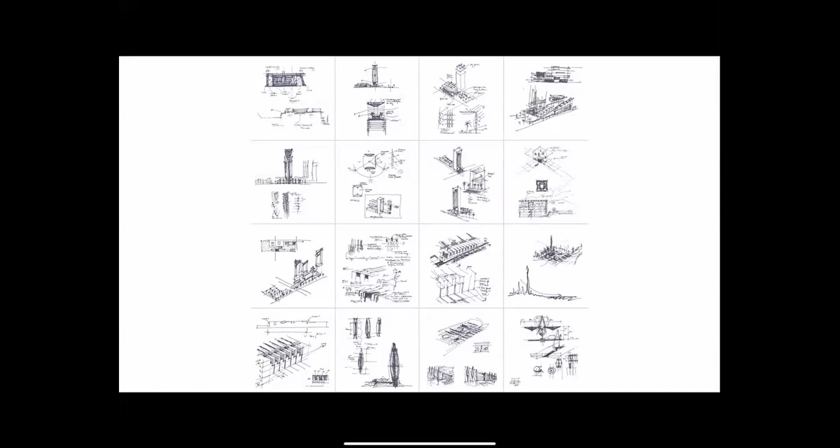And you can see that the center of gravity very much is in Canada and the US, but our UK and Middle East groups are also pretty healthy, and we tend to work very much as design groups. Each group has its own design center. We understand the specifics of our region, the culture, economy, what kind of projects work in this part of the world. And I've been very fortunate in my own life to work with Norr for 24 years now, all in Dubai. And it's been a tremendous opportunity to build a design culture in Dubai for our group, and then to really see what boundaries of design we can explore for our clients in the region.

Over the 30 years that our group has been here, we worked on a wide range of projects. And what ties our work together is our core belief. Our core belief is really that many minds are better than one. This kind of collaborative approach to design, where the owner, operators, engineers and architects, interior designers, specialists, we all come together to create, to explore options and then to hopefully create something unique.

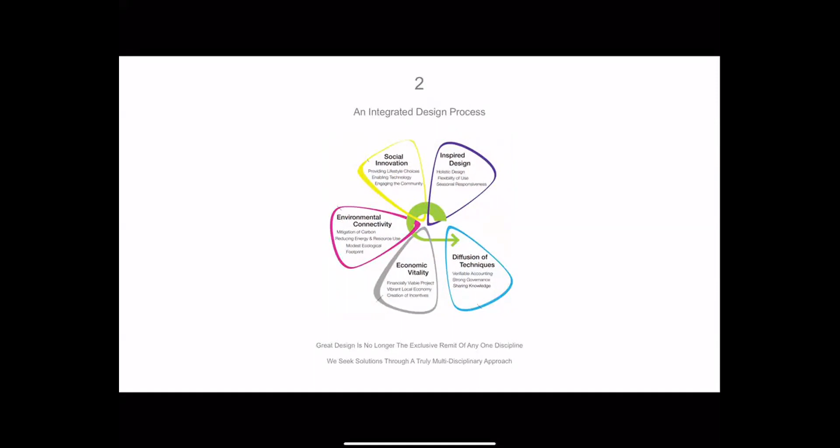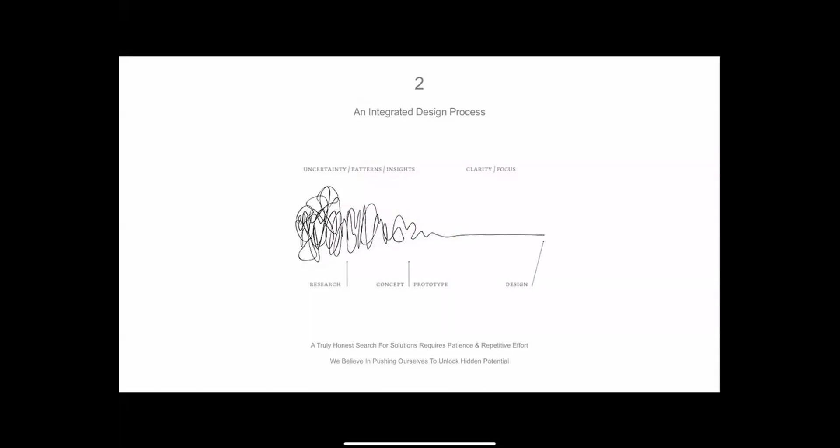We also believe in an integrated design process, one where science and art, economy, social concerns, environmental concerns, they all have to be dealt with simultaneously. It's not really a question of doing one thing first and doing the second thing later. You actually have to do everything at the same time. And so research and conceptual work, for it to be rich and exciting, and for it to really push boundaries, you have to be honest in your search. And that requires a lot of patience, and it also requires a lot of repetitive effort. And finally, we believe in technology.

Technology is changing our lives in tremendous and dramatic ways, and the future is really something many of us are wondering: where will technology take us in the near future? So the power of collaboration, an integrated design process, and embracing technology really is the thesis of how we work.

And I think that's why it's really exciting that we got a chance to join you this afternoon in Bangkok, but different times of the day across the world, to show how some of these beliefs have shaped this particular project. And then the kind of work we do, I'm just scrolling through it very quickly to give you a sense. Certainly we are known for high-rise buildings.

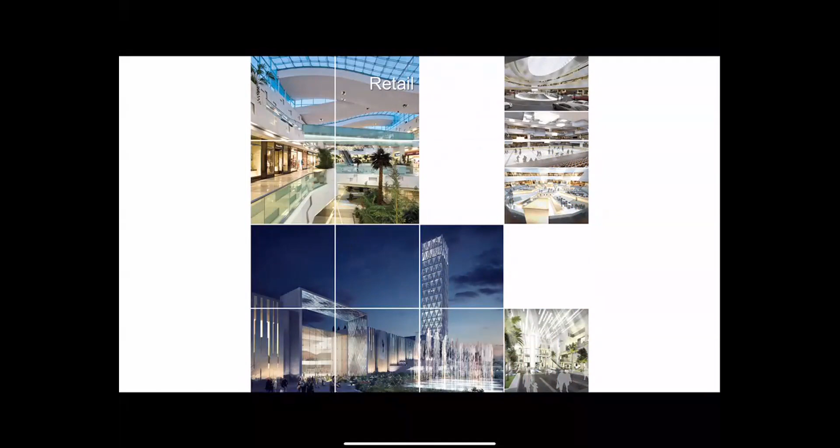We are known for that, but we also design horizontal buildings. And we believe that design doesn't care actually whether the building is horizontal or vertical. The thinking behind the design, this idea of integration, collaboration, and technology, that is really key. And these are a few quick snapshots of our studio in Dubai.

And this process is almost like, the vision really is that our studio is really like a university. It's an opportunity for us to pin stuff up and to move things around through vigorous debate.

So about a year and a half ago, and it seems like a long time ago, I received a call from the first group, our client. They said there is a potential project for us to look at. They didn't say we had it. They said, why don't you look at it and tell us what you can do? And of course, I showed up, and there's your skyline.

And very soon we discovered that they were looking to acquire a property in partnership with another partner. And that property would be developed. At that time, the thinking was that property would be developed into a 50 to 60 story tower, which would be sitting right in front of the Infinity Tower, which is already there.

And when we started to look at this project in the context of the city of Dubai, it occurred to us that where Dubai is known as a city of landmarks, we had the opportunity to propose a new signature tower that would then triangulate and connect visually to some of the other iconic buildings, either built or under construction.

What was also exciting about this project, and is exciting, is its location. It's a waterfront project with really amazing views out to the ocean, views back to the Dubai Marina, which is a very recent development. If I were to take this photograph 20 years ago, there were no towers at all. All of these have been built in the last 20 years.

And then looking back to the desert, which you see in the distance, and then looking back to downtown Dubai, which you would then have on a clear day, you would see the other signature towers, which is the Burj Khalifa on the left and the new tower that's under construction in the Creek Harbor on the right. And so that was the discussion we had with our client.

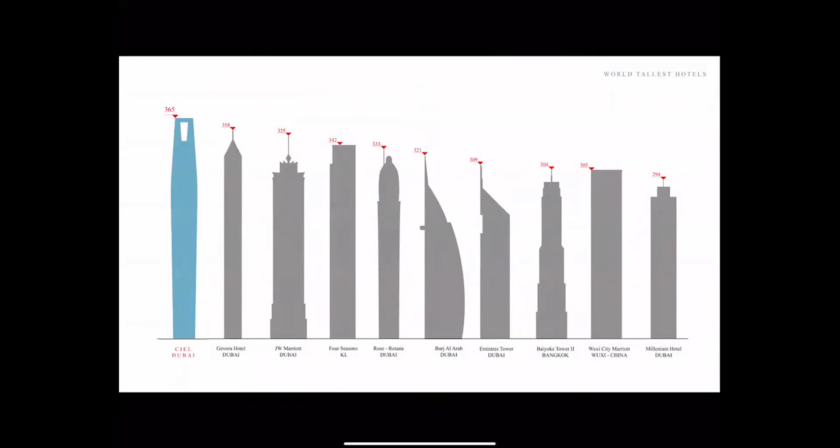The property is not a very regularly shaped property. It's a residual space that was generated when the highway was diverted. And so really the question was for us, what can we do with it? A less than ideal property. And through a very significant process, with the tremendous support of our client, we found a way to solve the problem, hopefully with elegance and restraint.

So when we were looking at this triangular property, it occurred to us obviously that there would be a parking structure that would sit there. And in fact, an earlier consultant had already designed a residential tower of about 65 stories for this property. And that project looked basically like that. That project had an 8-story podium and a rectangular residential tower. And the piling had already been done. This was done in 2007, 2008.

And so 11 years later, the piles are still in the ground, but the project was stopped during the previous economic crisis. And so the question for us was, how can we use the earlier design, especially from a structural point of view? How can we use it, but then retrofit it to become a hotel?

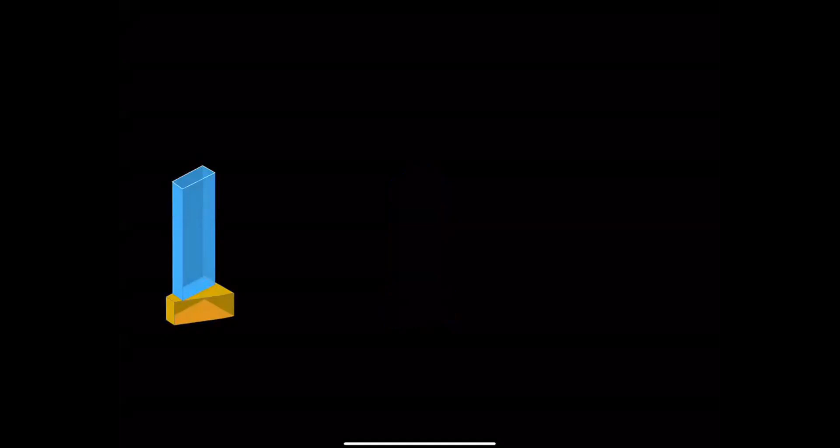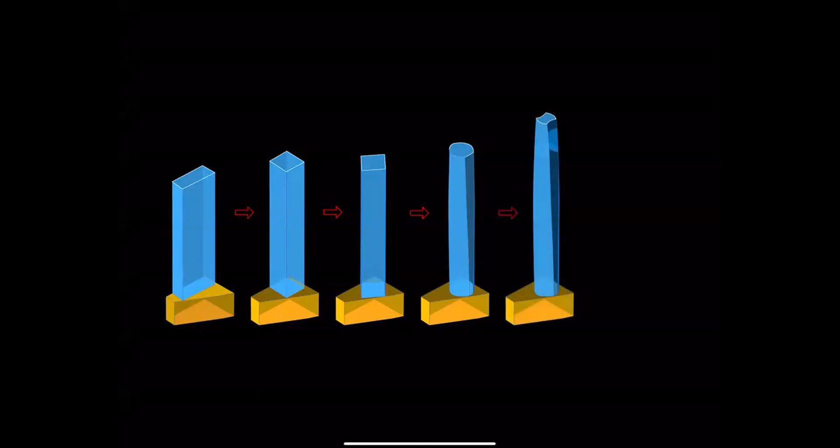And in the early moments of the discussion, it occurred to us that we should look at this project from an open mind. Yes, we will have to deal with the existing piles, but we really should question how we shape the tower. And the process was a very interesting one as we evolved our thinking and looked for a solution that would actually deal obviously with the existing piles with some additional micropiling,

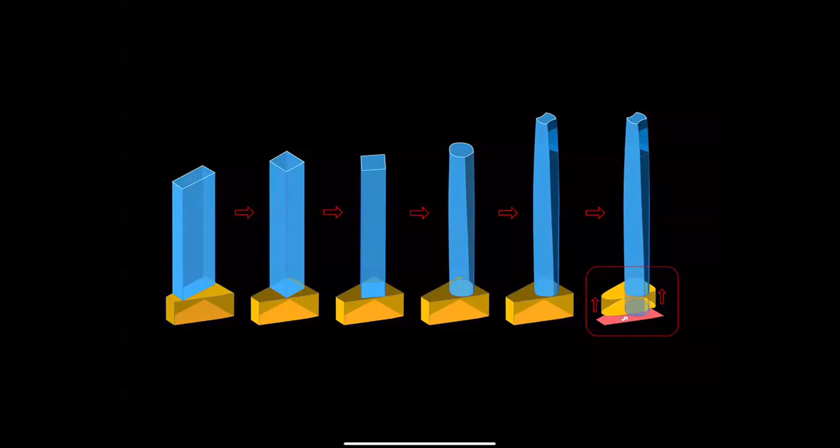and then a shaped building that responds to the very strong sea breeze that comes into this site, but also the idea of lifting the entire base of the project, lifting it up to create an urban space and a drop-off arrival space on the property. And this was a very ambitious goal.

And to be honest, during the process, there were moments where we felt that we're trying to do too much. The property has a lot of restrictions, and will we really succeed? And partly through luck and partly through just dedication and hard work, we have been able to solve it.

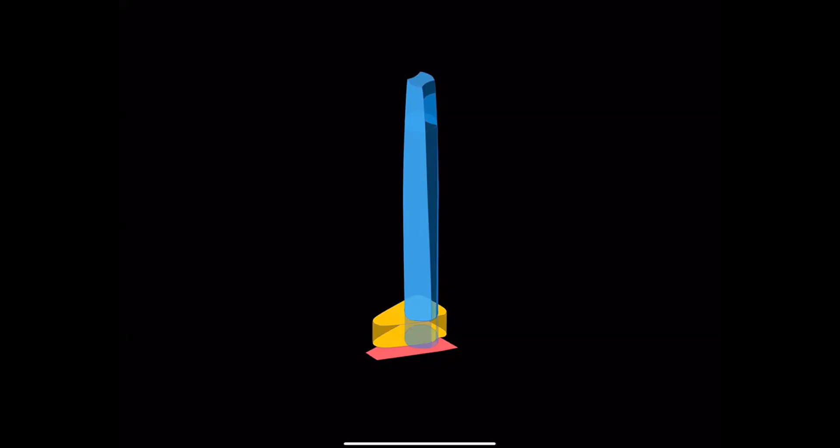The other great consideration was the idea of integrating landscape and nature into the scheme. And very early on, with our client, we proposed that this tower would not just be an ordinary tower, and yes, it's super tall, and yes, it's going to be the tallest hotel in the world, but what else?

And our proposal really is that it's a building that creates a vertical urbanism, an urbanism where landscape and shared spaces rise from the initial moment of arrival through the leisure deck and all the way up the tower to the landscape garden at the very top at about 360 meters above street level, through a series of naturally ventilated gardens.

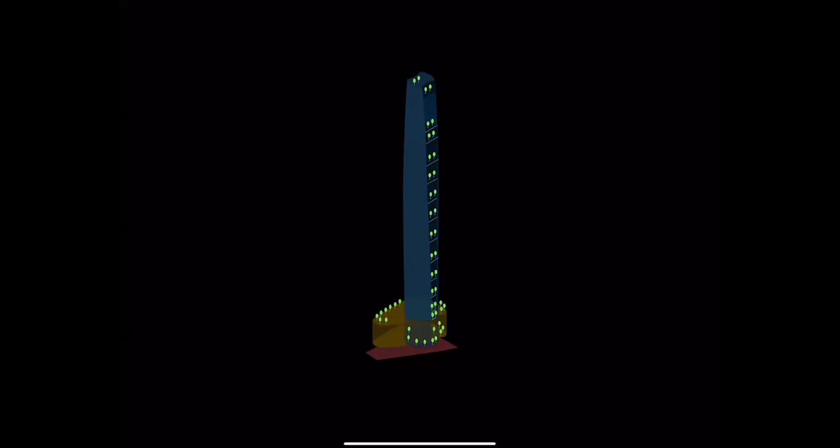And this idea of combining landscape, architecture, engineering, interior design, and then environmental systems, structure and mechanical electrical systems, how do we mold and sculpt all of this to give us what we really want? And we want it not just because it looks elegant, it should work elegantly for the users who use the building.

There's 1,042 keys in this project. There's 5 restaurants, 2 swimming pools, leisure decks, tremendous amenities, shared amenities for the hotel users. How does it feel to actually stay in this hotel? How is it different compared to other hotels?

And that kind of questioning really, in many ways, requires us to step back and to draw and to think, to look at things really from their very, very basic ideas. And we believe in drawing. We believe as a group, and certainly I've dedicated my life to putting my thoughts on paper, even if they seem crude or not well developed.

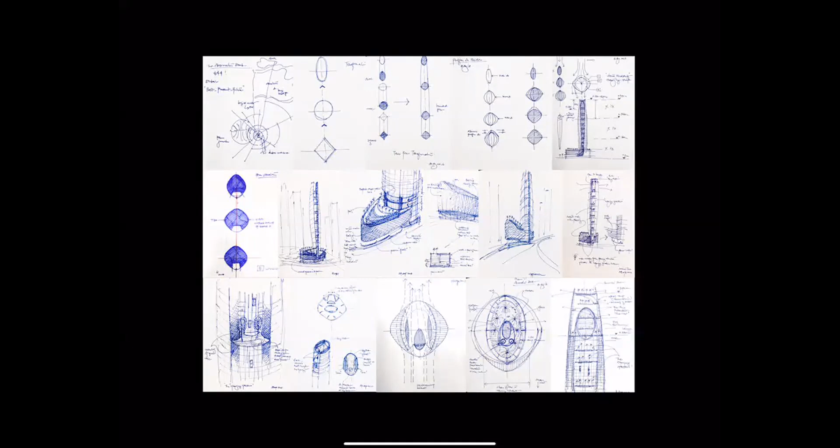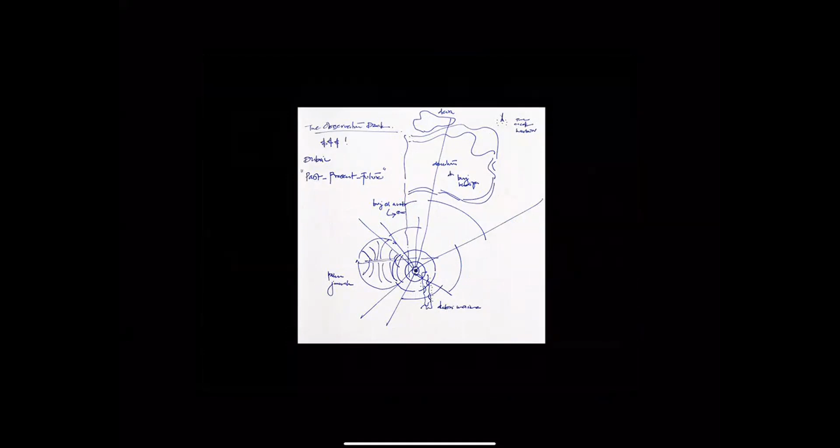Drawing is a process by which we share ideas as they come to us. We test them, we keep some and we throw away most of it. But through a continuous process of thinking and sketching, we explore all kinds of issues.

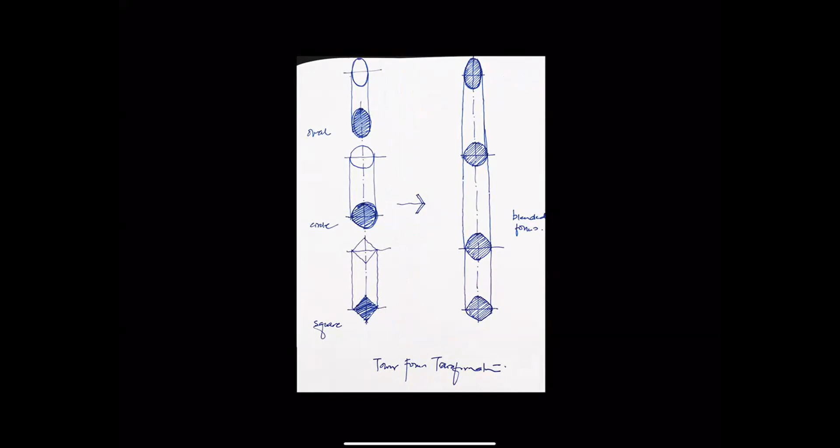Early in the project, we recognized that a super tall building needs to deal with wind and with all the vortices and the dynamic issues that come with a strong wind direction, and how we would shape the tower so that it is a transformative shape. It is not a shape that's consistent, but rather a shape that transforms as it rises up the tower.

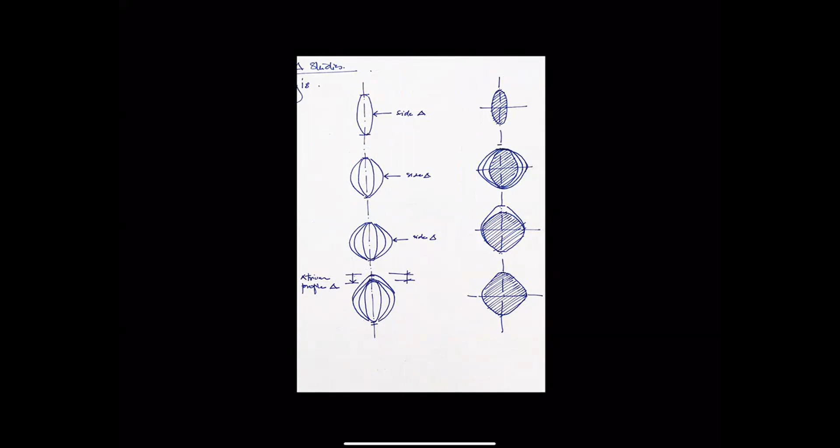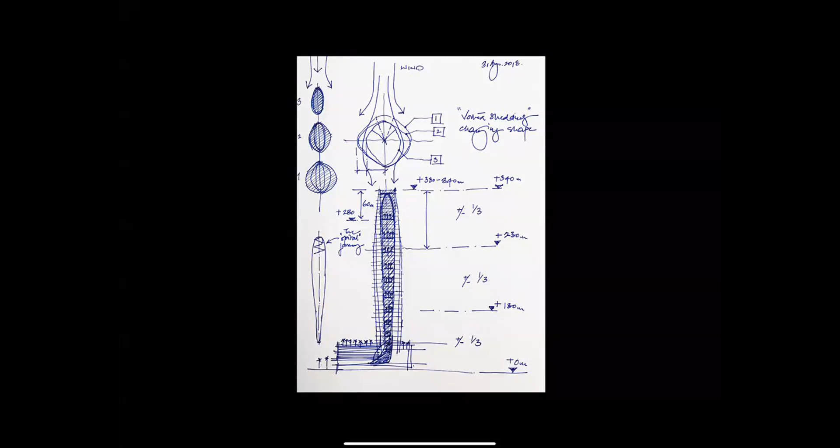And almost like an onion, the skin of an onion, the floor plates then really change shape. They taper and adjust vertically through the tower. And at the same time, we looked to open up the shape to introduce these gardens, the gardens that look out, that are embedded within the tower. They are naturally ventilated. And they actually create the shaping of this building.

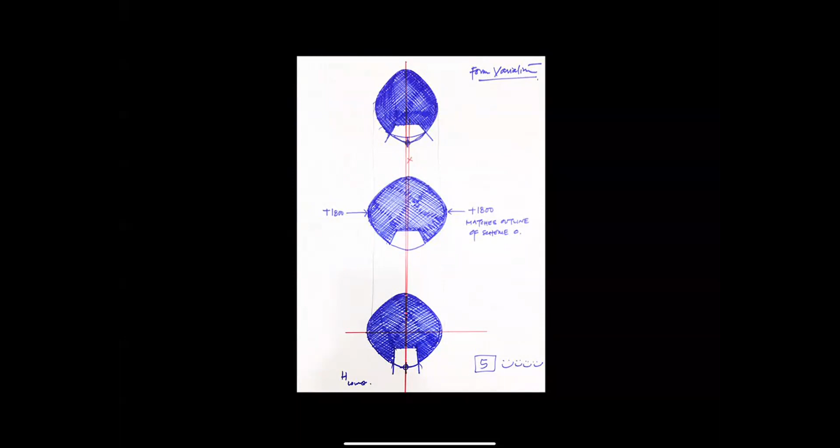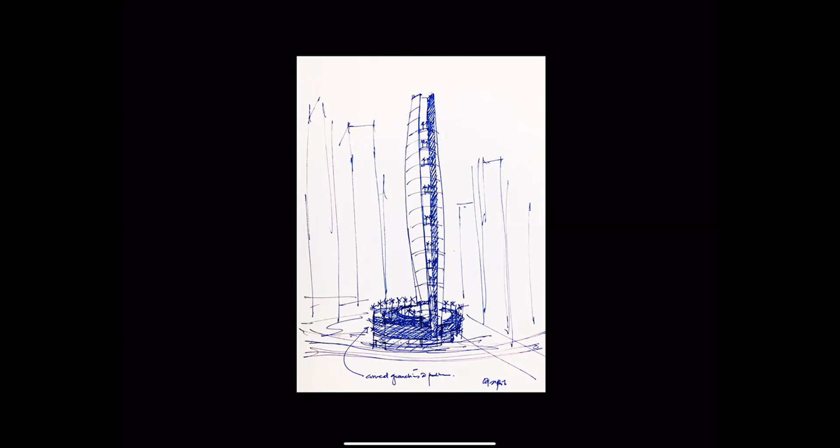So from the lowest footprint to something in between to a larger footprint, even as the shape of the tower changes, the shape of the atrium gardens are also changing as we go up the tower. And then how the tower embeds itself in the base of the building, which is a parking structure and has lobbies and back of house facilities. Ultimately, it has a leisure deck.

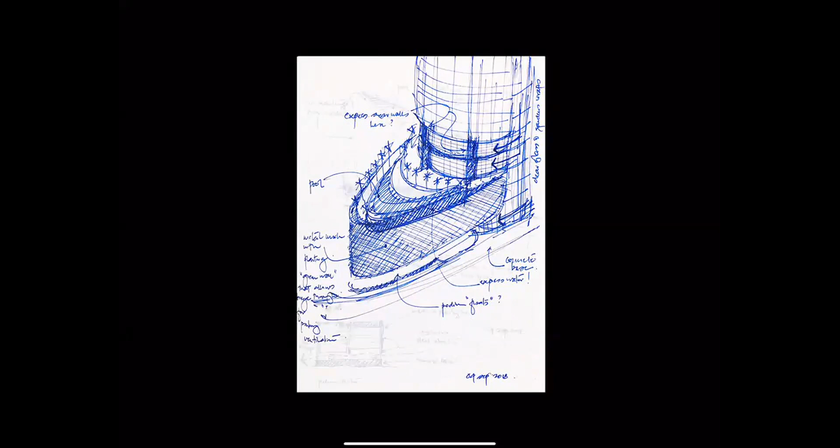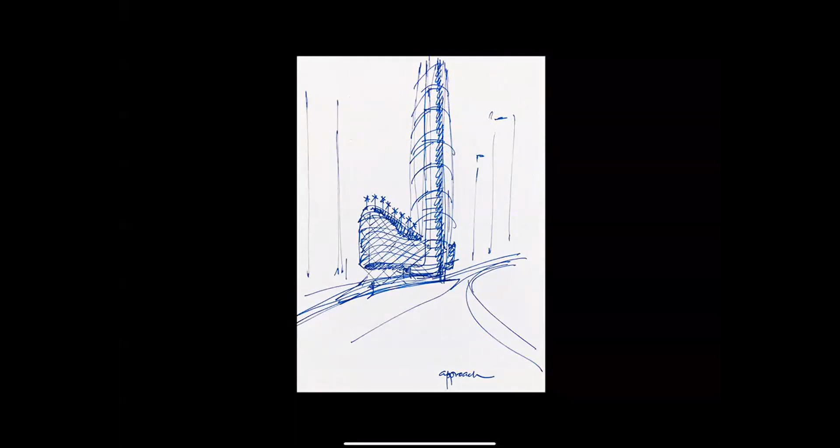How all of this meets the ground to create something, again, that responds to the unique geometry of the site, and at the same time creates shared public space that can be used by the users. And so lifting this podium up, this entire parking structure, lifting it up by about 10 meters to create an urban drop-off zone under this parking structure was in some ways almost as difficult as designing the tower itself.

So designing a tower grabs a lot of attention, but how the podium is designed, and the structural and other challenges, were tremendous. And then the thinking of these hanging gardens, the gardens that are embedded within the tower, which are naturally ventilated.

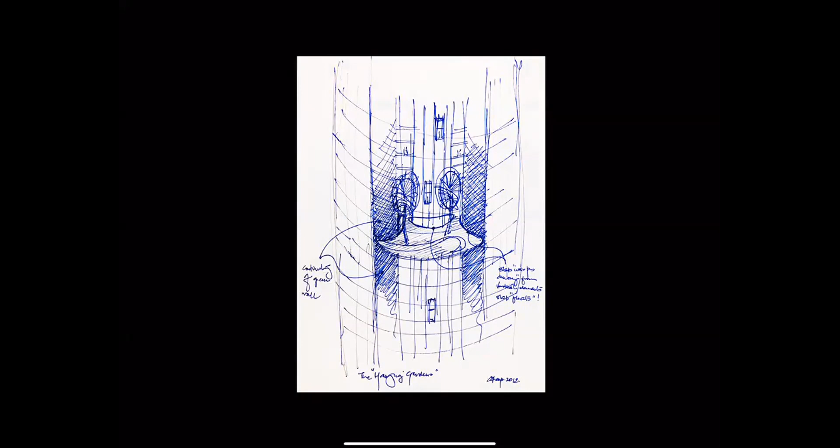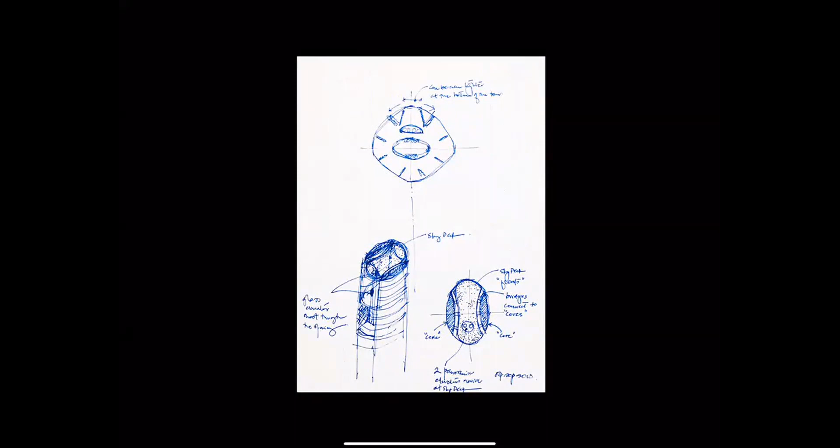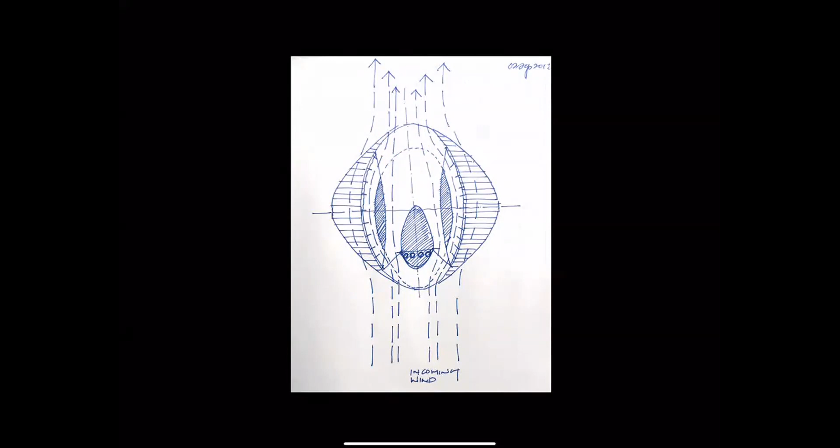There are 12 of them stacked vertically, roughly 6 to 8 floors in height, with panoramic elevators that go through the space, where the top of the tower then becomes another unique event. In this case, an observation deck, and actually a second swimming pool, the horizon deck, infinity edge pool, and then a garden at the very top of the tower, which is an observation deck to look out over the city, over the harbor, and over the Arabian Gulf. Again, it becomes a fantastic opportunity to do something special.

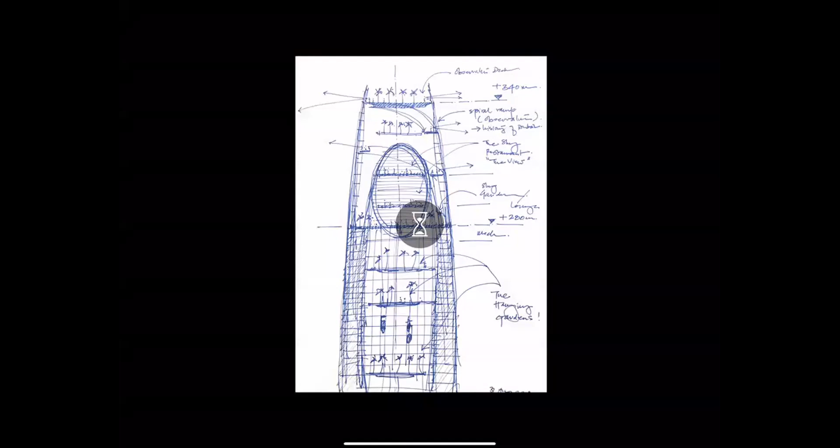How do we get there? How do we test these ideas, and how do we convert sketches to concrete? And that's a very long and patient process. Within our studio, we have a 3D lab where we have 3D printers. We have tremendously talented people who are dedicated to the craft of building models.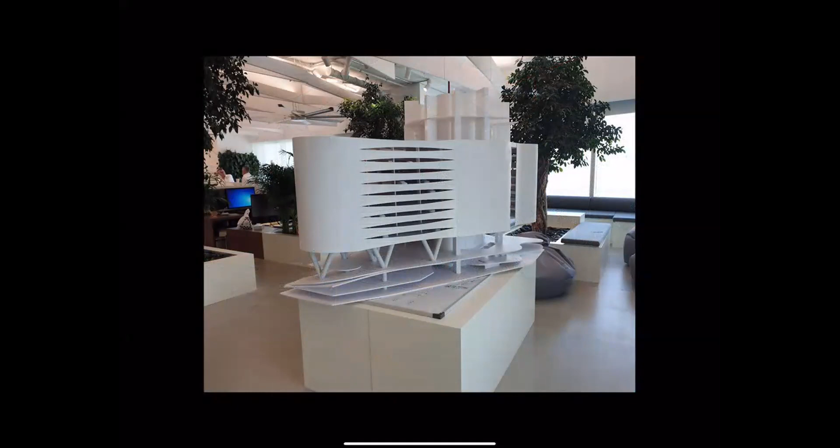The podium, as I said, was actually a very, very complex piece of engineering and thinking. It started out relatively banal, and then over time, and you can see that we build models at different scales. So this is a model just to test the base of the building. And you can see that the podium is lifted up. The parking structure is lifted up with these V-shaped columns to create a drop-off condition under the podium.

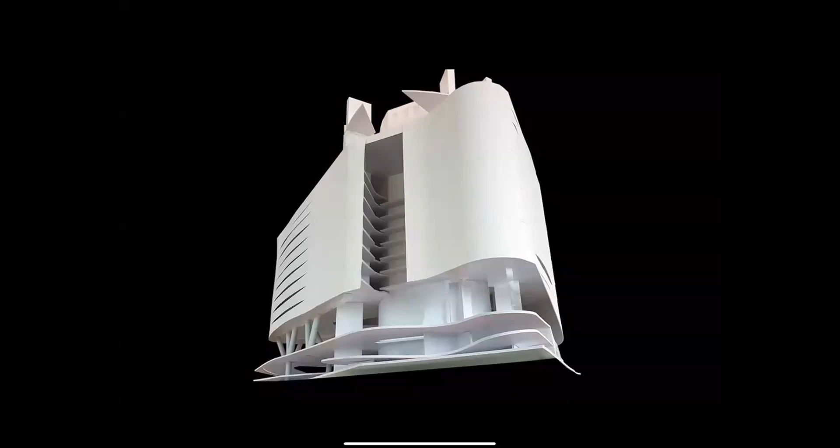I'm going through this very quickly, and I hope that's okay, because there's quite a few slides, and then really we need to get to our discussion. But this idea of embedded complexity, but the challenge is how to make it look effortless, how to make it actually not look that complex.

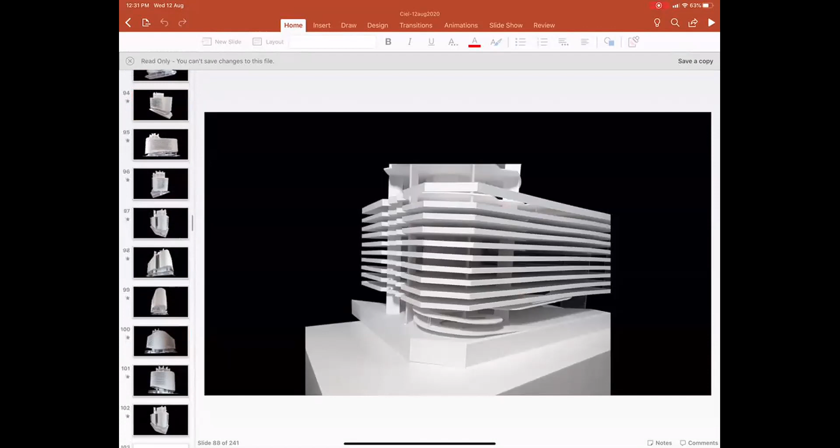I think I lost the PowerPoint. Sorry about that. Chris, I lost the PowerPoint, right? Are you there? Yeah, we can see you. You're scrolling through it to get it back. I'm trying to get it back. Yes, I'm not sure why it did that, but it did. I think I'm back. So now how do I? Yeah, okay. There we see you. That's it. You're back. Yeah, I'm back.

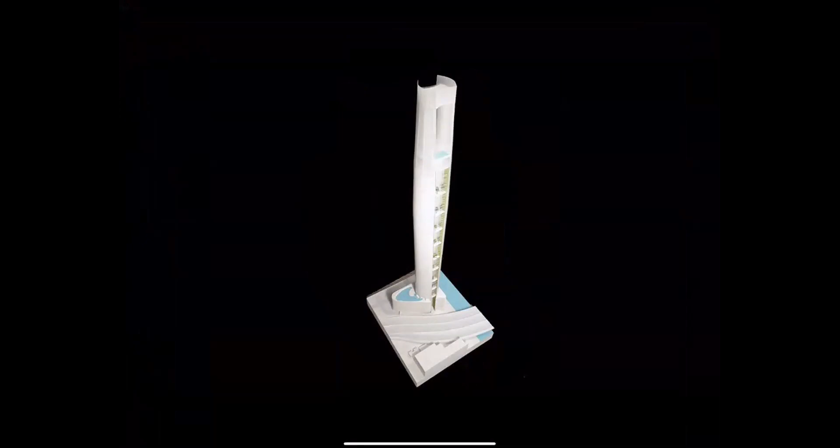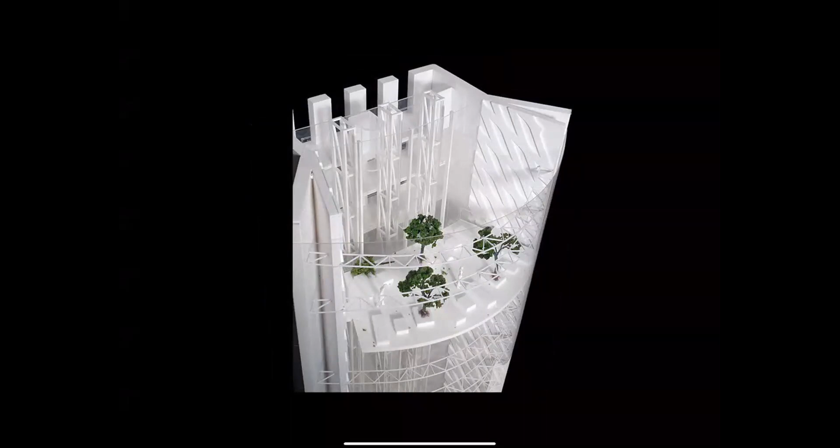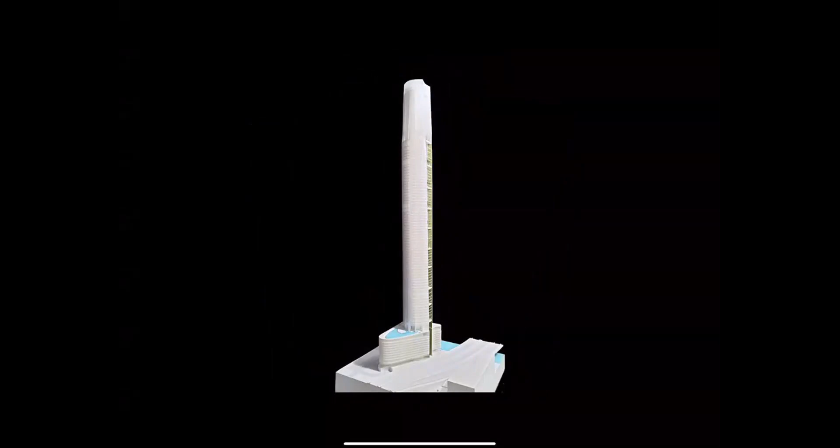And then of course the tower. So the tower with the gardens facing the ocean, and we've built many models as we tested also the nature of this atrium space. What does it look like? How big is it? How is it used? And I'll show you some of the initial environmental modeling for this space. But really the concept is that these are gardens that are embedded within the tower and that rise all the way from ground floor to the 82nd floor.

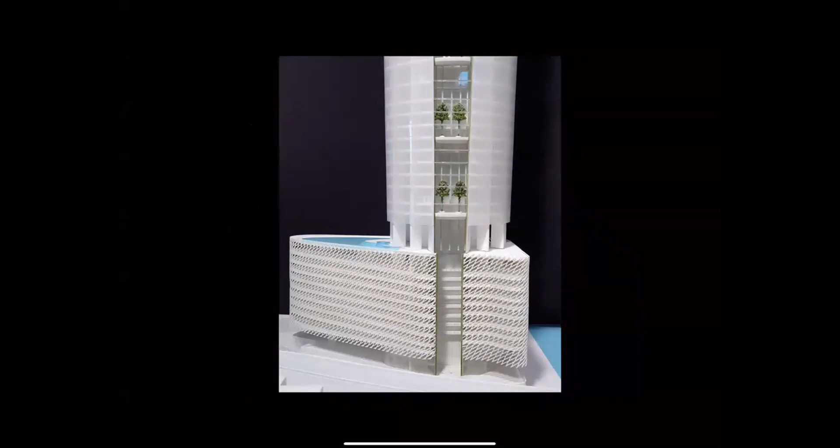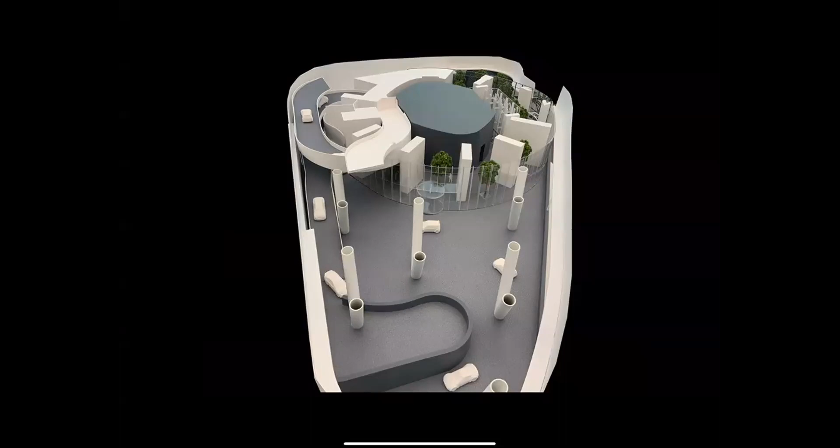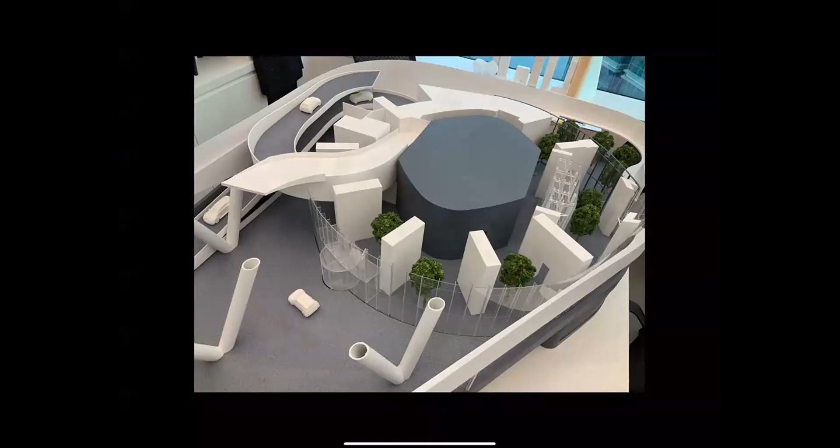This is an earlier study for the podium, and I'm showing you some of these models. This is a recent model we built where we are exploring to understand better the arrival experience. What does it feel like to arrive in a car in this drop-off zone? And again, our objective is to pare things back, not to add makeup, but rather to expose the structures, to expose the radial shear walls, the concrete core in the middle of the tower, and to wrap that structure with a very transparent glass screen. And again, embedded within it, of course, are these landscaped elements, trees and water.

And this will be the experience, and we are still looking at the actual design of the furniture. How will the furniture interact with the structure and the trees and all of that? And I think that's going to be a really, really elegant sense.

Yahya, we've lost your voice.